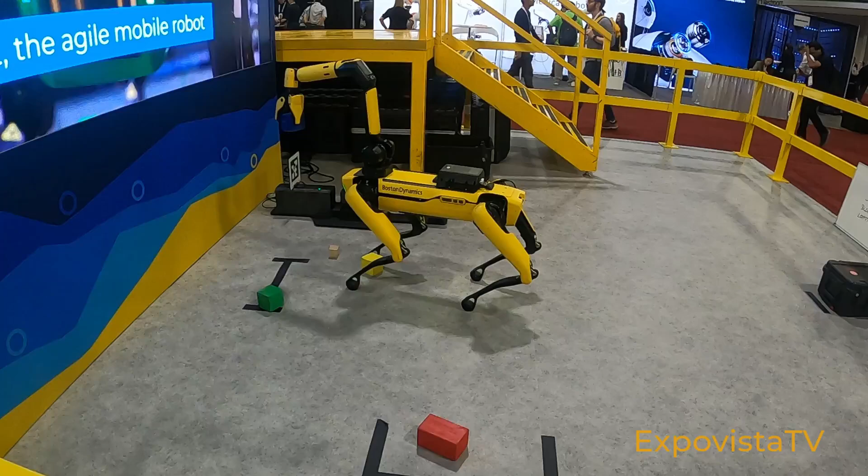This is Spot from Boston Dynamics at the recent ICRA 2025, one of the most attended events about robotics. Here we see the Robodog grabbing a blue box. His task is to put it on the top of the red box.

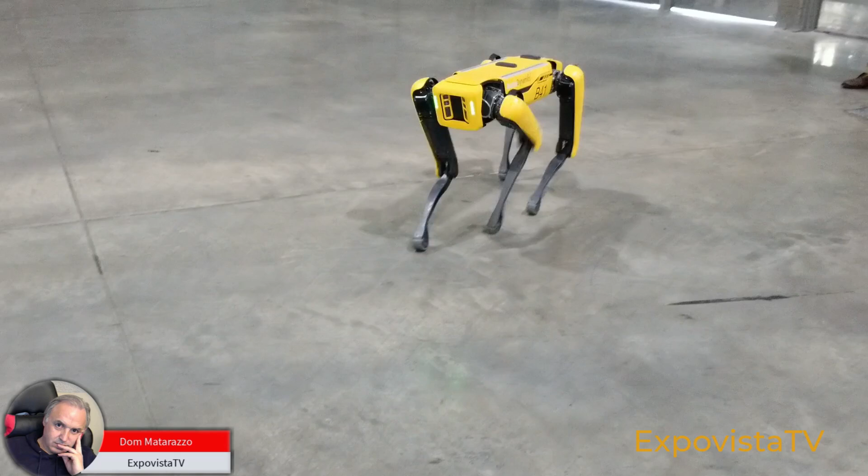And here is Spot when he was a puppy 5 years ago, when he was presented at MODEX 2020, the main event addressing the logistics industry. Aside from the accessories on the top of his back, the movement of its legs and body hasn't changed much in 5 years, from MODEX 2020 to ICRA 2025.

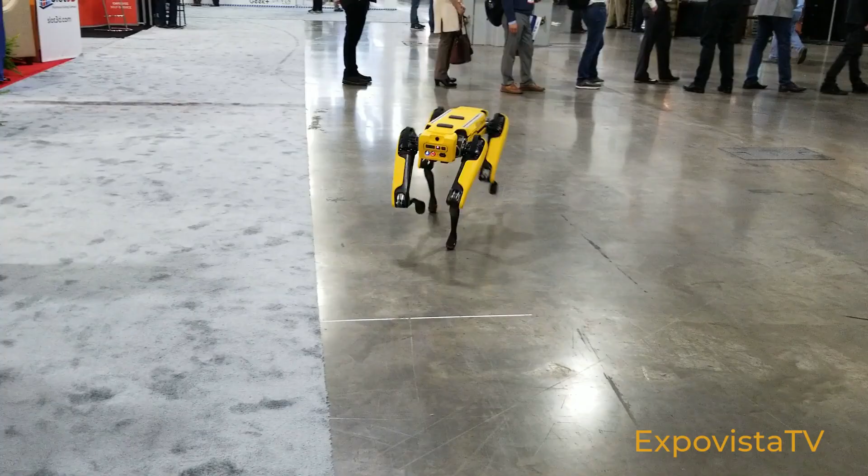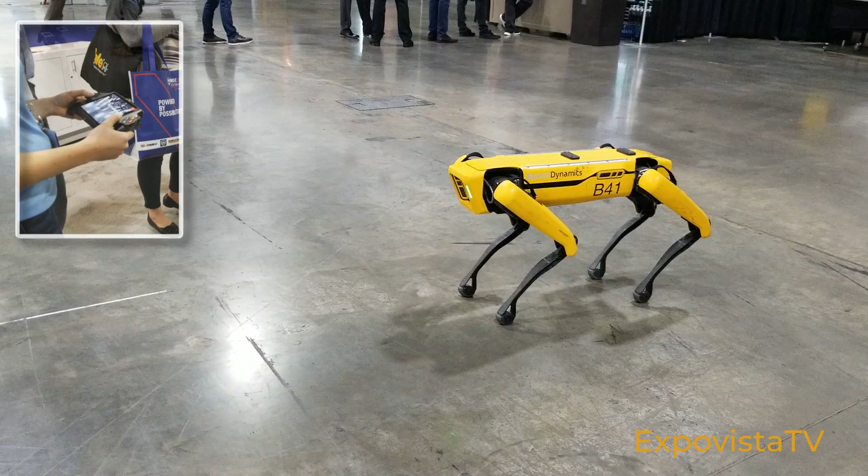But if we switch the focus from Spot to the surroundings, here is what we notice. 5 years ago, Spot was remote controlled by an operator, as we can see in the picture. The Robodog was moving around as an operator controlled it with a sort of tablet, and cameras on Spot could show and map everything Spot was seeing.

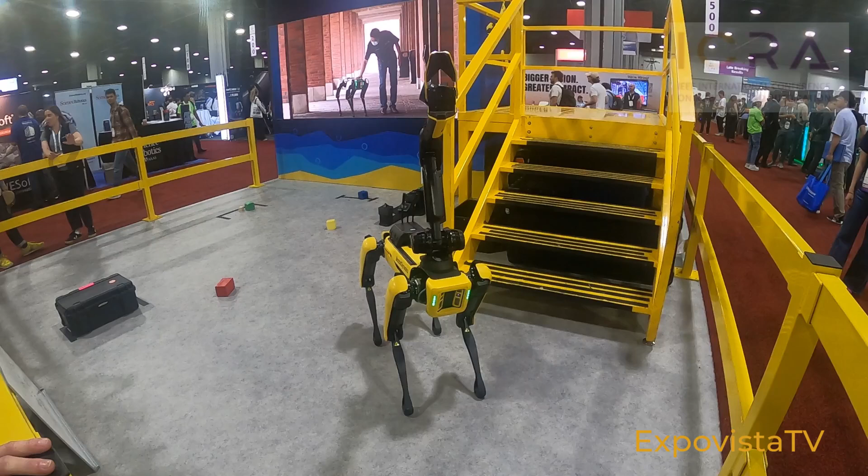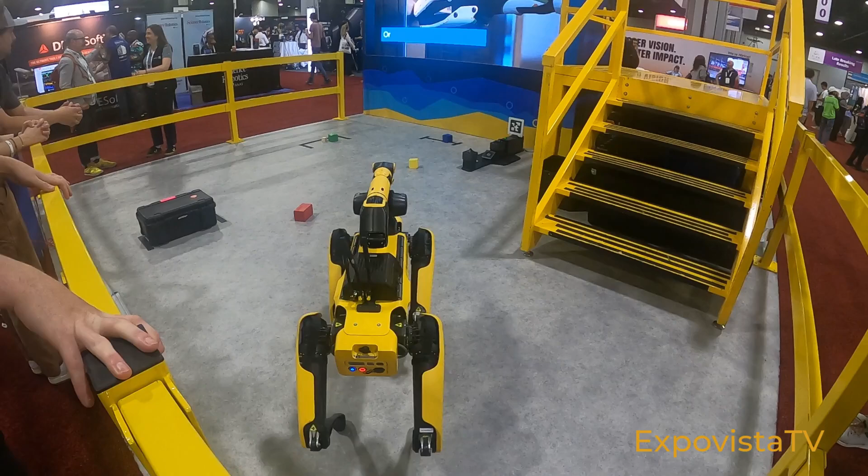When we saw Spot more recently, there was nobody controlling it. If we take a panoramic view, we don't see anybody manipulating Spot, and this was confirmed to us also by the people from Boston Dynamics at the show. Spot was performing a task by simply reading the instructions on this board on the floor.

The transition from the joystick to the prompts took place in October 2023, when Boston Dynamics unveiled a proof of concept where Spot was equipped with ChatGPT and other AI models. This integration enabled Spot to understand natural language prompts, but also to make decisions based on the environment and respond with speech.

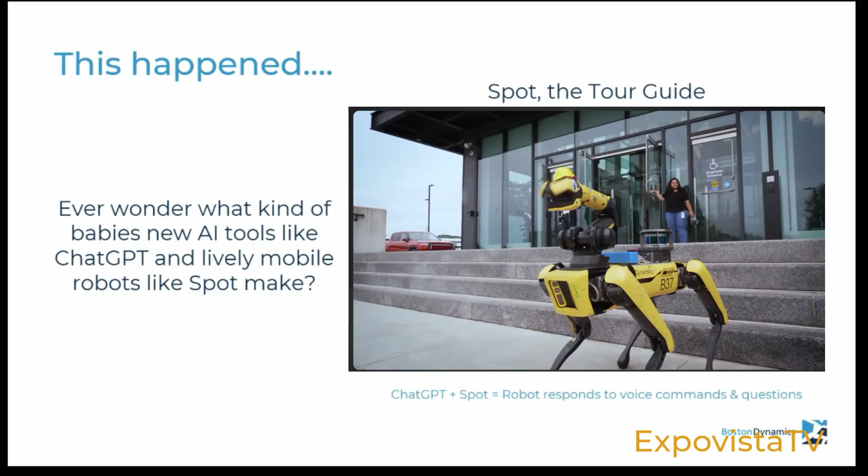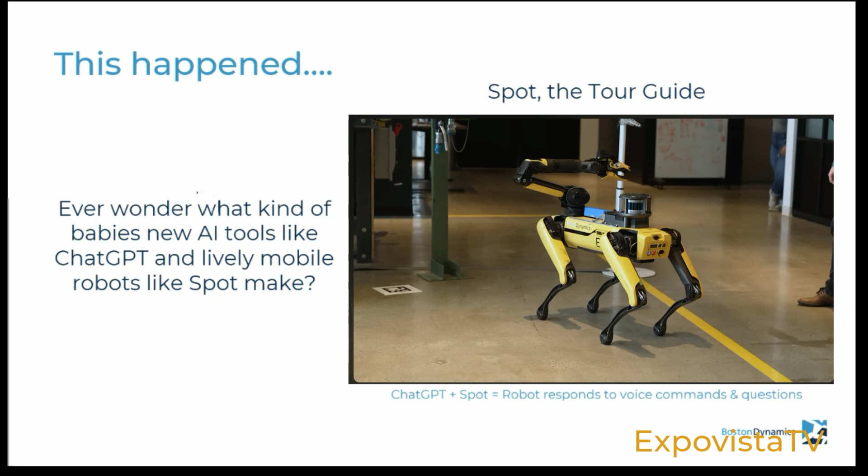We didn't hear Spot talking during ICRA 2025, but Boston Dynamics has videos in which Spot acts as a tour guide, describes the surroundings, answers questions, and even adopts various personalities, like a British butler or a Shakespearean actor. This is what they say at Boston Dynamics.

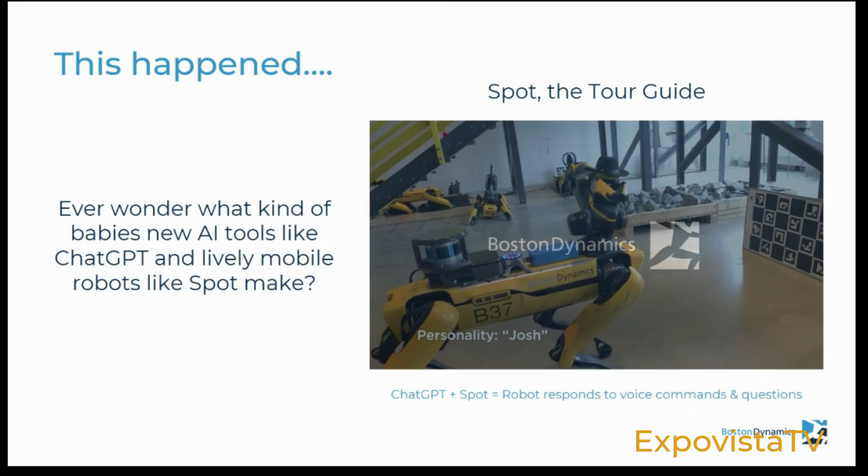Plugging an amazing tool made by OpenAI, ChatGPT, together with a robot. A very light layer of engineering. But what starts to emerge here is pretty cool, right? The idea of a future in which we're conversationally interacting with robots is coming.

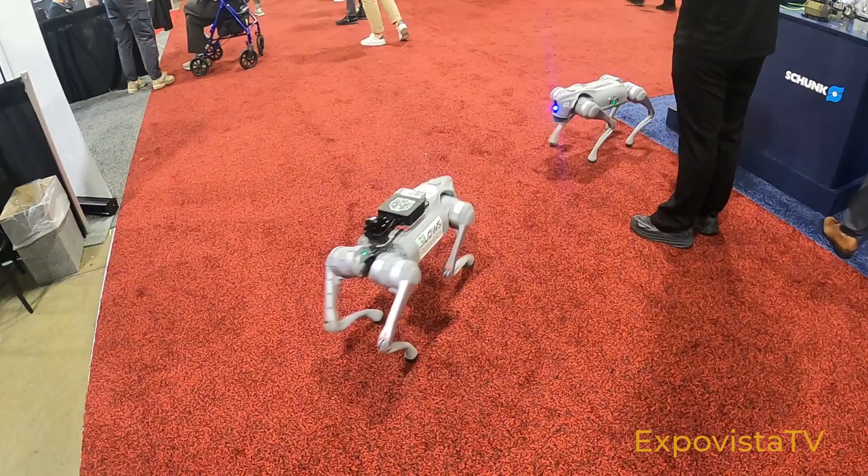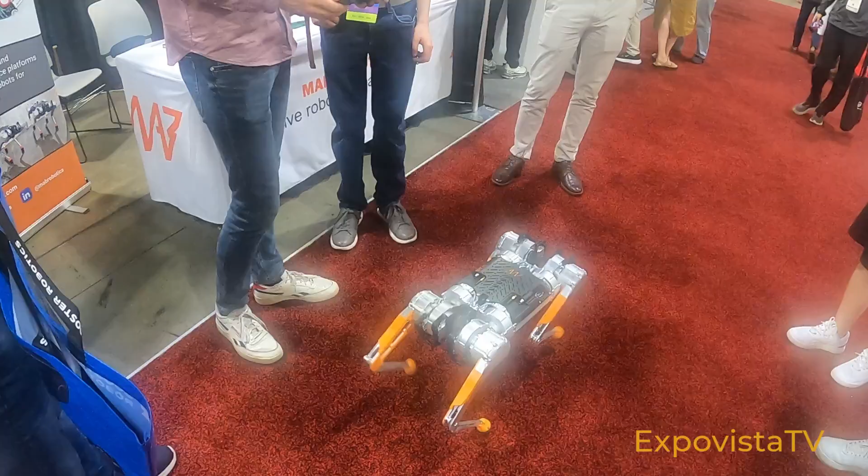All the Robodogs we saw at the show were remote controlled, and some didn't even move. The robots from Unitree, for example, were also at the show, and they are probably the most used Robodogs for research due to their agility and affordability. They were also remote controlled on the show floor, but the research papers presented during the event featured Robodogs, including Unitree dogs, equipped with AI, so we can assume that all Robodogs will get smarter in the near future.

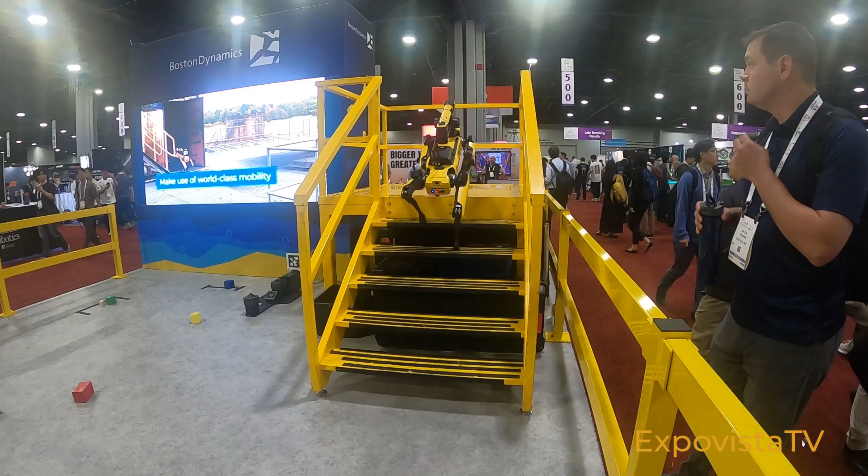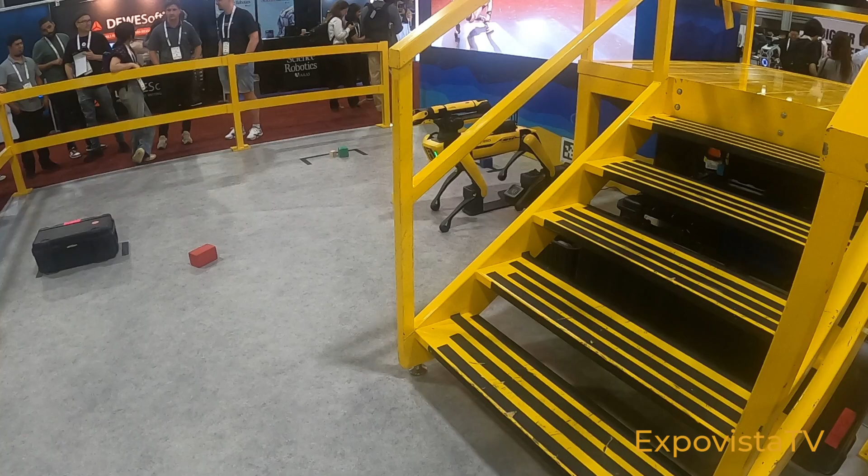Here we also see Spot climbing steps without any problems, or going straight to his charging station when he needs to rest or recharge. These movements seem very simple, but they are the result of constant testing, data collection, and perfect integration between software and hardware. You don't have to take our word for it. Just listen to what Aaron Saunders, CTO of Boston Dynamics, said at one of the recent NVIDIA GTC conferences.

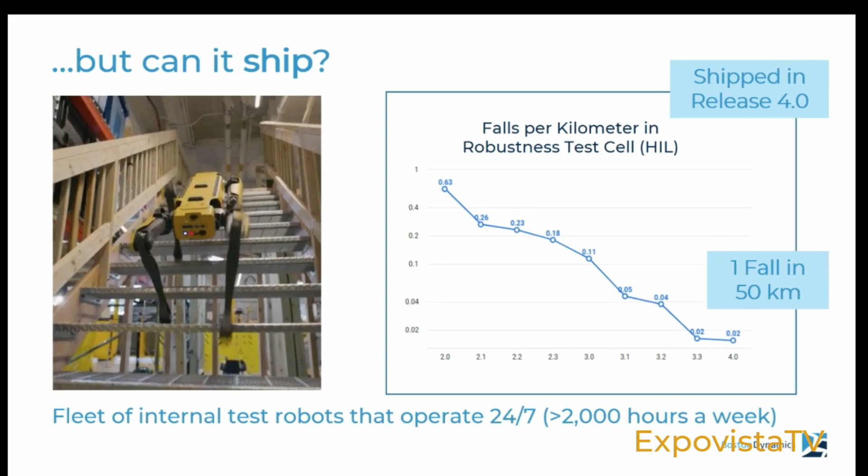Test, test, test, right? You can run an almost unlimited number of simulations, and then you can follow it up with some amount of physical world testing, and the only thing that limits you is the amount of hours that you can get on a robot. This is a little video of a test lane. This is one of the areas that we test our products.

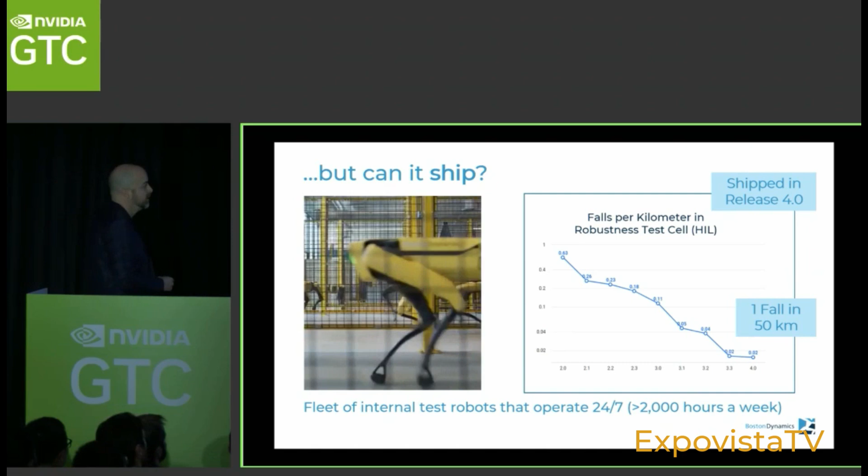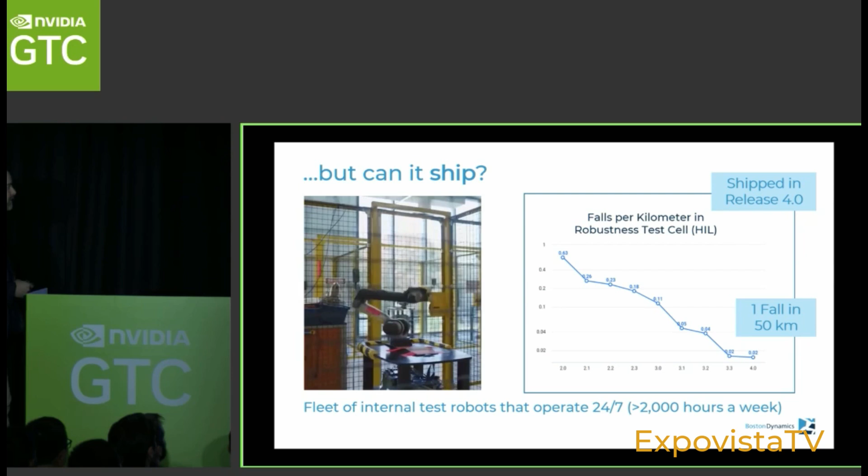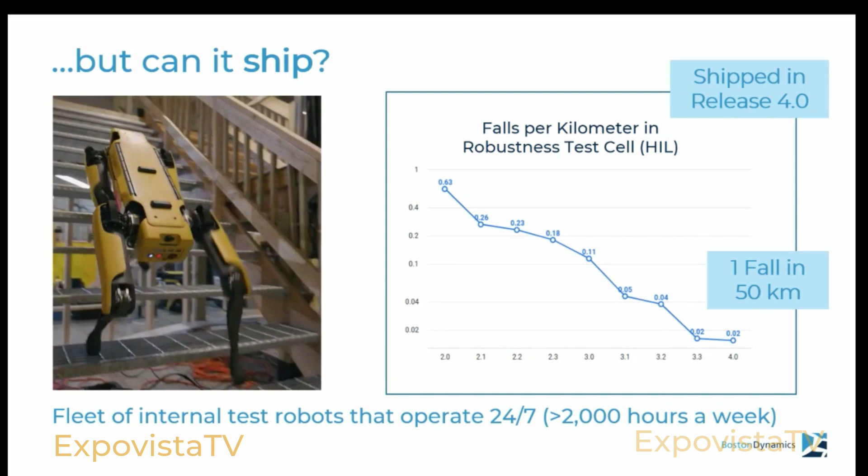Our quadrupeds in the building, our test fleet, operate 24/7. They travel about 2,000 hours of locomotion or 2,000 hours of tasks, whatever they might be, a week. They do it in thermal chambers, they do it up and down stairs, we replicate pieces of our customer sites. There are ones that walk outside in the rain and the snow, there are ones that walk inside on carpet and static. And this is really about robust hardware-in-the-loop testing. So the Spot robot fleet has cumulatively walked 250,000 kilometers.

Right now, it's aggregating one circumference of the globe every 3 months, so the fleet is walking about that far every 3 months. When we sold Spot for the first time, there were a few hundred units around the world. Today, there are 2,000, and the demand is increasing as new business and new sectors discover the potential for a robot with these capabilities.

This means Boston Dynamics has to make sure the robot doesn't fail, which in dog robot language means it doesn't fall. In the last 5 years, Spot's balance has improved dramatically. When we started at 2.0, the level of falls was about 0.6 falls for every kilometer of walking. At the time, this was okay—there was no other product like this on the planet, so that was an acceptable place to be.

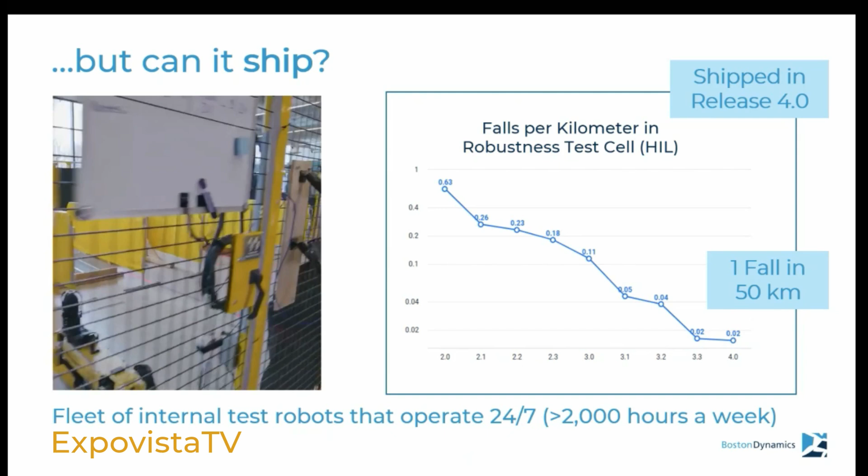But as we got into industrial sites and started working with our customers, a falling robot, even if it can get up, is not a good robot for a customer. So even though Spot can recover from almost every fall, it's still not a good idea for the robot to fall, because customers will perceive that fall as a problem, or it could be a legitimate hazard, or it could break the robot. So we worked really hard at driving that number down.

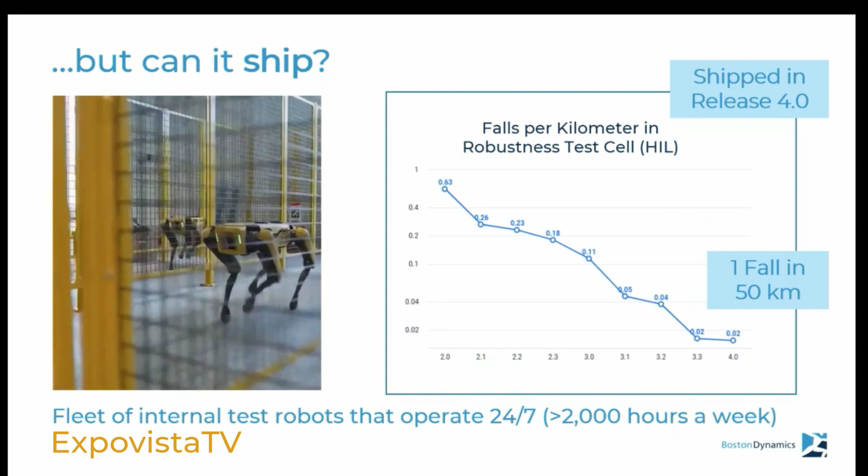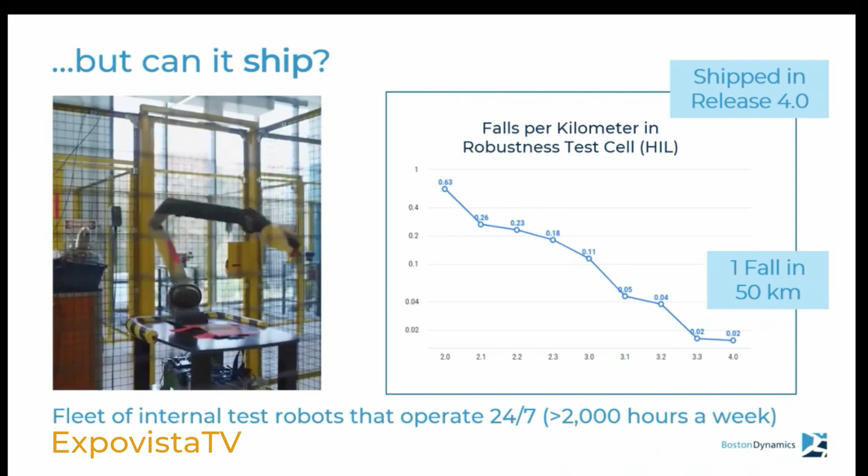Over the software releases, you'll see a consistent improvement. This is a combination of improvements in our hardware and our software systems, but right around 3.3, we got to about 1 fall in every 50 kilometers. So Spot can now walk about 50 kilometers for a typical customer and only fall once.

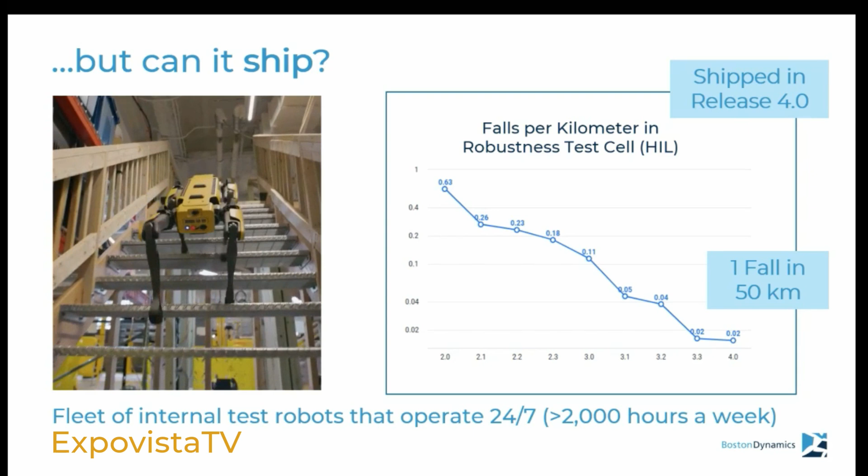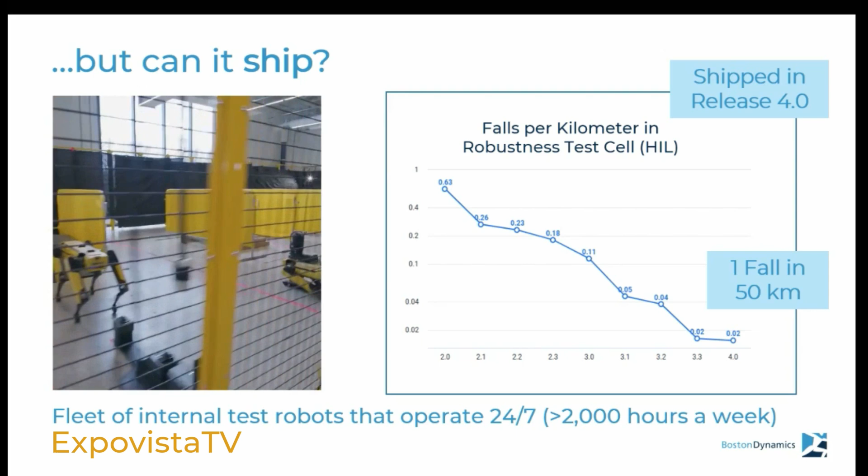20 years ago, these things didn't exist. And 5 years ago, none of these things were in the real world. So getting to 1 fall in 50 kilometers is a big feat. The teams worked really hard on that, and we still want to take it further, of course.

Performance is something we've always leaned on. There are a lot of different takes on how important it is for a robot to have performance, but for us, performance unlocks the ability to really explore untapped potential. Whether you're building a robot that can walk in highly unstructured outdoor terrain, or a robot that's manipulating things, you don't want to be limited by the machine. You want to be able to explore the capabilities of that machine's kinematics and the potential of those applications. So we really want to make sure we build performant machines.

Recently, with the backing of Hyundai, we've really gotten into vertical integration. This lets us speed up development cycles—we're able to manufacture our robots and change them quickly, and that's key to moving fast, because these robots are far from being done. We've got new machines out in the world in new industries, and we need to be able to keep up with the changes. On the software side, most of what we do is vision-driven autonomy, so we're looking at the world around us, understanding the environment and its context so we can understand how we want to interact with it.

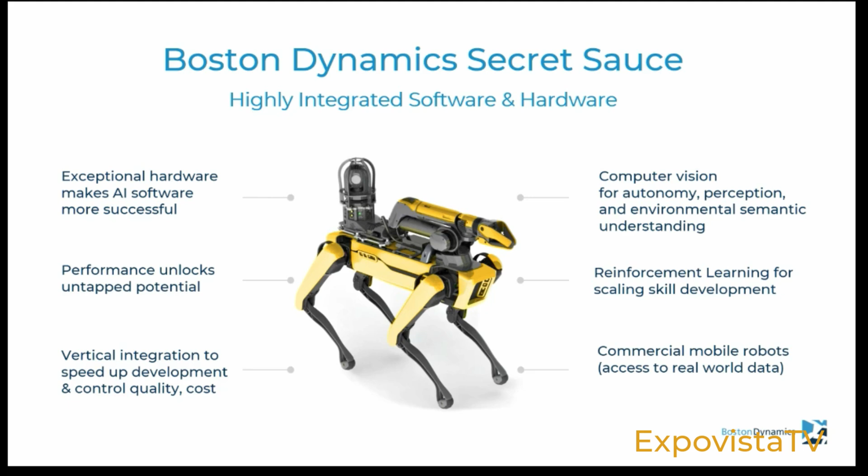Reinforcement learning—I think we're going to talk about that a lot today. This is an emerging capability for the industry, at least when it comes to product. And then lastly, we're commercializing, and I think this is really one of the central secret-sauce things for Boston Dynamics. When you have a commercial mission, it provides focus—it's where we're finding intersections that weren't there before. You could talk to machines before, you could talk to your cell phone, you could talk to robots, but starting to merge together characters, different languages, and how you interact with machines is a pretty exciting thing.